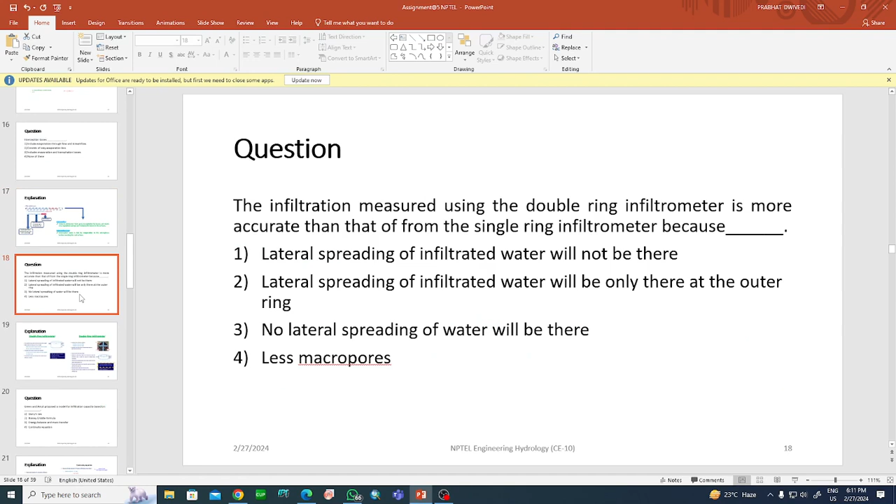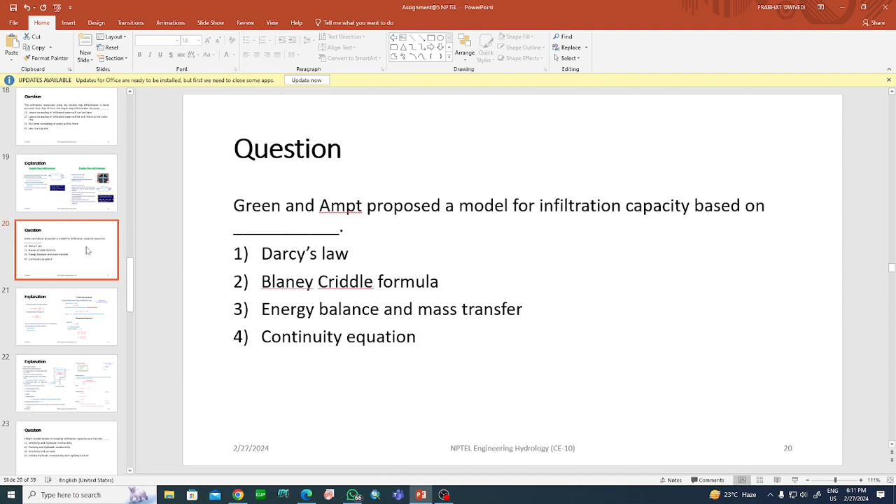One question please. We have one session from 6 to 8 and another from 7 to 9, two scholars are handling, is it right? Yes. Okay, last week I was a little late, at 6:20 or 6:25, I was asking permission to enter your session. Not last week, the week before that I think. I wasn't able to join, so I attended the next one, 7 to 9. Actually, sorry for the inconvenience. No, no, it's okay. I'm looking at the presentable screen, I'm not able to quantify that. No problem, no problem, it's always best we join in time. Thank you. So both are aimed with the same purpose, am I right? Yes, of course. Thank you.

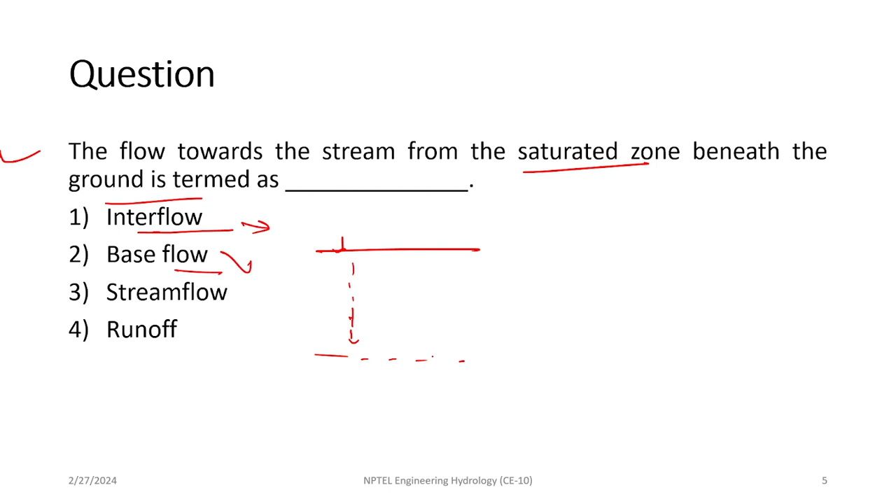Because whenever we are talking about interflow, that is a part of the groundwater flow only, and it is also generated because of the delayed movement of water. Whatever precipitation is falling in the region, it is moving, or getting infiltrated to a greater depth, and then getting accumulated and finally causing groundwater flow, meeting at a stream. So it will be called base flow, I guess.

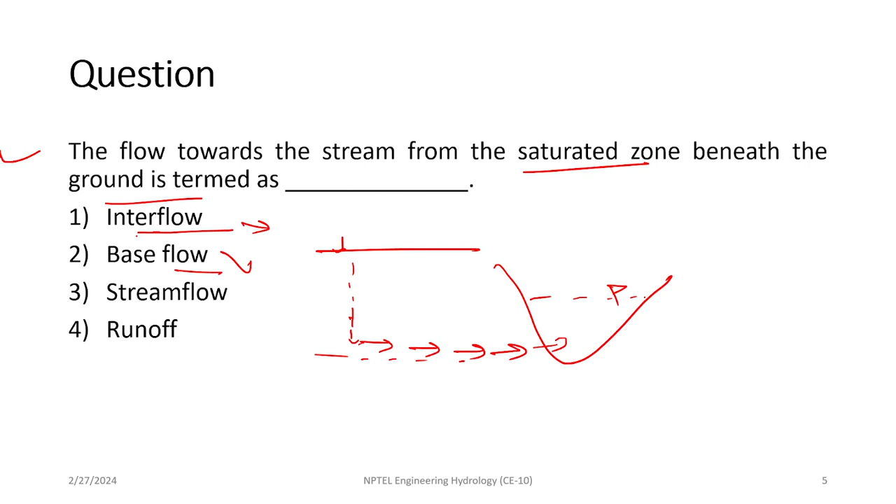So in the explanation you can see there is a water table. Base flow is caused because of the saturated region of subsurface, but if I consider the above part, that is unsaturated, here the interflow process is dominating. So within the unsaturated zone there will be a flow towards a stream, and at the same time in the saturated zone, water movement is dominating and causing groundwater flow towards a stream, so it's called base flow. But in the unsaturated zone, interflow process will be dominating here.

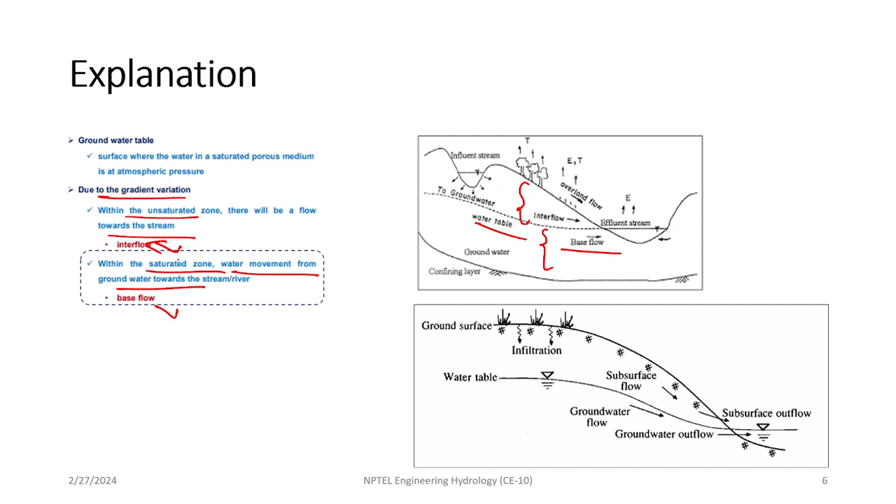Moving ahead, we can also see some explanation. Interflow is the lateral movement of water in an unsaturated zone, that is returning as surface water into a stream. But in the case of base flow, it is just a display of delayed flow.

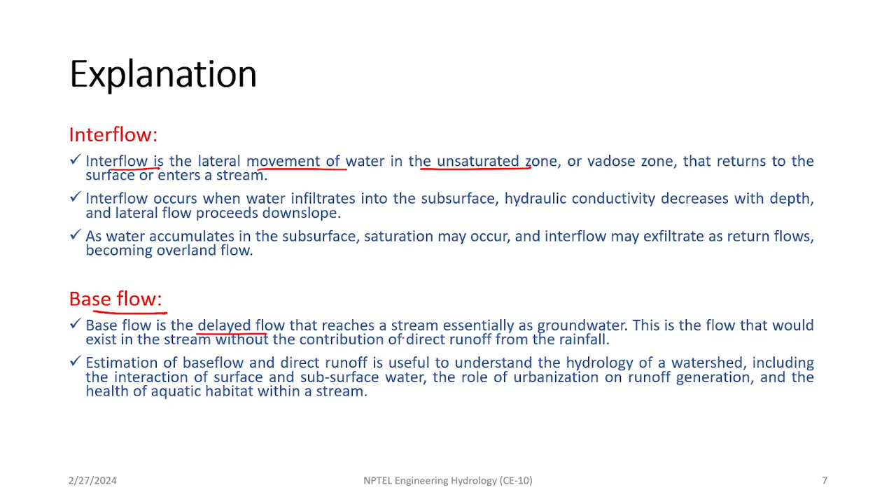Now coming to the question, which of the following equation is not used for infiltration capacity? So firstly, I want to know what you understand by the infiltration capacity.

There could be certain kind of land surface. Rainfall is falling in the region. There is subsurface strata. Now there will be a soil porous media, I will say that is soil, so connecting voids will be there. So if I am talking about the infiltration capacity, you can say that it is the rate at which the infiltration process is dominating in the subsurface soil.

So here it is asking what are the estimation methods available for quantifying the infiltration capacity. Anyone can answer? Yeah, it's Penman equation. Penman's equation, yes, right, NPTEL.

Okay, so Penman equation, can you further tell me where we are using this equation? Evapotranspiration. Yes, evaporation or evapotranspiration. Right, yes, of course. So Penman equation we are using for computing the ET in the region.

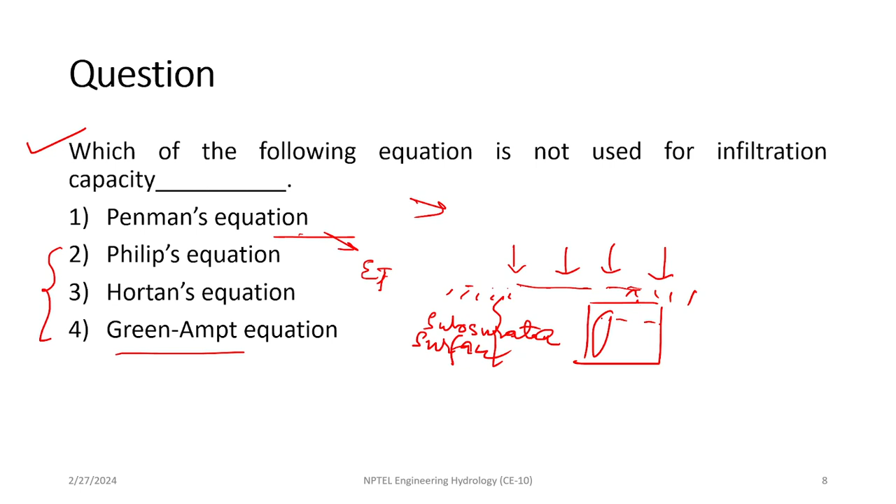So here Philip's equation, Horton's equation, as well as the Green-Ampt equation, these methods have different parameters, maybe different input data that we have to give, and then subsequently we are getting the infiltration capacity. For your information, I have just added a slide describing that Horton equation is part of the empirical equations, while Philip's equation and Green-Ampt are the theoretical equations.

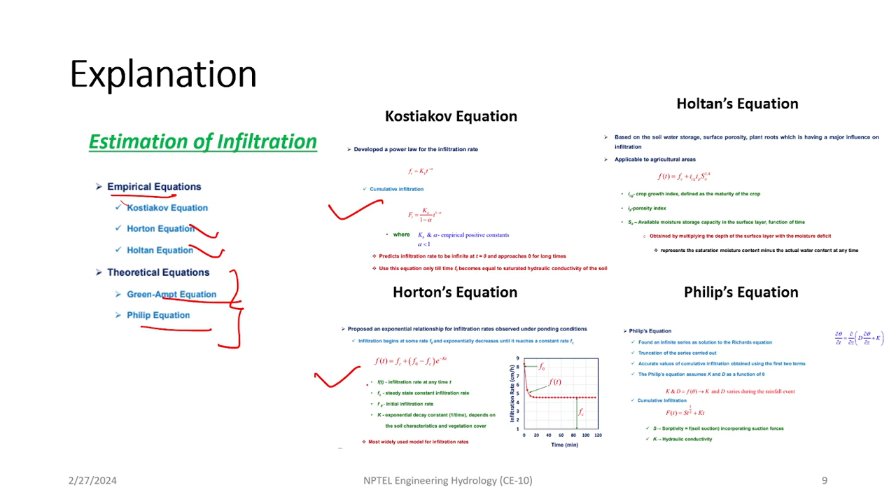And you can also see, you may be knowing whatever the general formula is mentioned for the different empirical equations. You might be knowing this from your lectures. Coming to the next question.

So, dash is responsible for flow of water in an unsaturated media. Yes, this is related to a kind of forces which are acting in the subsurface zone and then subsequently causing a flow. So what are they? List them out.

Suction head and datum head. Okay, suction head and datum head, right? Another one will be, can you guess another option? There may be multiple options as well. So yes, of course, if you are talking about the unsaturated zone, only the suction head and datum head will be dominating. But yes, if I talk about flow in the saturated zone, in the subsurface zone, then velocity gradient will also be accounted.

Not the velocity gradient, it will be a velocity head. Okay, well, yeah, yes. But in case of unsaturated zone, we know that groundwater flow is not dominating in this zone, right?

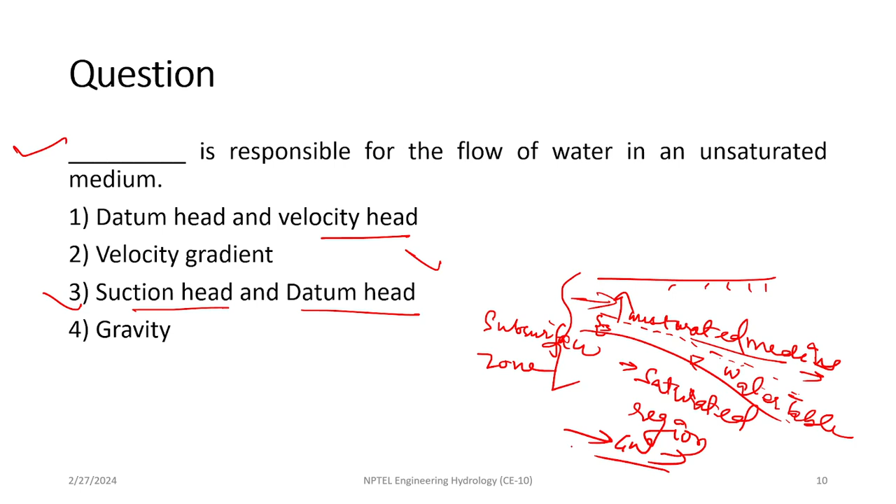Okay, but if we are talking about the water region beneath the water table, then you will call it a saturated region. So this is a saturated region. So definitely here the groundwater movement will be there, and because of this there may be a change in velocity gradient also, and that is causing a velocity head.

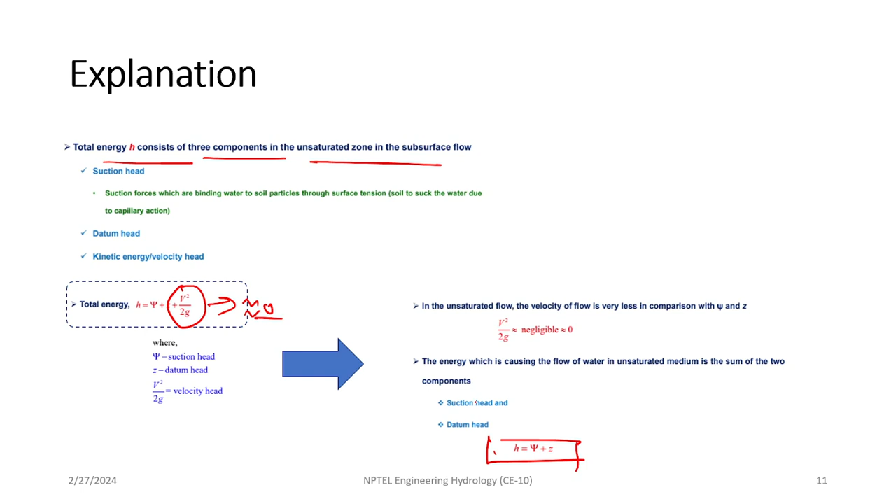You can see from the explanation, total energy H consists of three components in an unsaturated zone in subsurface flow. But you can note down here that this velocity head I am talking about will be nearly zero, okay, because groundwater flow is not here. So definitely the final parameters causing the flow here are suction head and datum head.

Moving to the next question: the moisture content in which zone is above field capacity but below the saturation. So it is asking about a moisture variation with the depth. Okay, so with the depth, how the moisture is varying. Are you getting, Ashish? Yes, yes, yes. It is asking about the moisture variation with the depth.

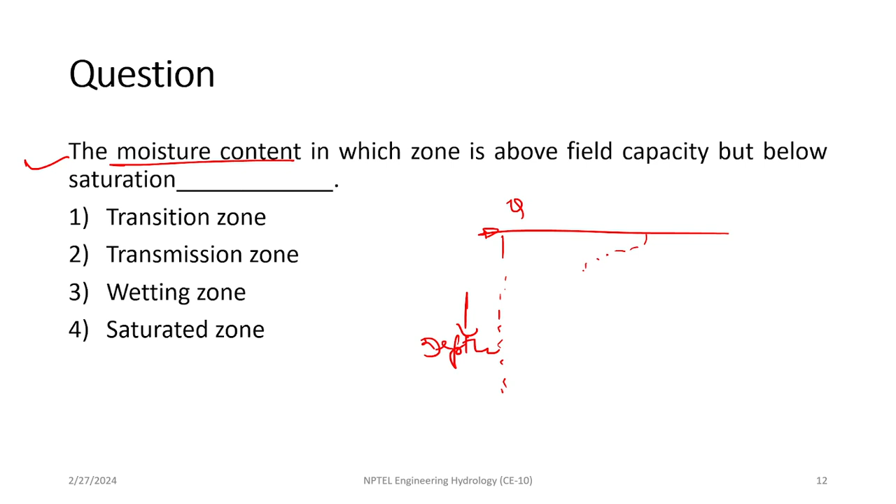So have you studied the variation of moisture content with respect to depth below the ground? You might be knowing the profile like this. Do you remember this profile?

Yes, yes, yes. So name them, what we are calling this region. There we are calling this region like as first. Transition zone, I think? This is not a transition zone. First one, it is not. Saturated zone, I think, right? Yes, right. So this is a saturated zone.

Why are we calling it a saturated zone? Because once rainfall is falling in the region, within, let's say t equal to 5 seconds, whatever infiltrated water is there, it is moving up to this much depth, let's say it is D1. But as the time passes on, this infiltrated water will be resisted by a front.

Front in the sense what? There will be a dry front, where the soil is not saturated, not having any kind of moisture, so it is not moving. Now there will be a change in the moisture content. So once it passes through the saturated zone, what would be the next zone you are knowing there? Transition zone. Yes, right. So transition zone will be there.

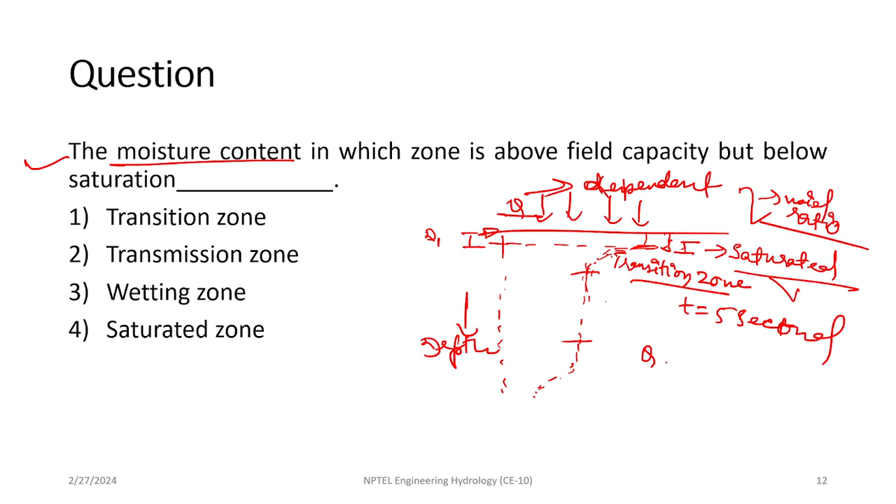So if I am saying that theta is 0 at a certain case, from the explanation you can see, I just added this for reference. Firstly, how is porosity defined? It is just volume of void divided by total volume of soil sample. And how do we define moisture content? It is just a ratio of volume of water to the total volume of sample available. So initially the soil is dry. If soil is dry, then definitely theta is 0.

Water has just started infiltrating. And the condition will be what? At the top surface, the moisture content is what? That is eta. It is equivalent to eta. As we are moving further down, we are seeing that the subsurface soil is getting moisture now, and it starts coming in the wet zone.

So here you will see a word, wetting front. Why is it called a wetting front? Because of this front, we can differentiate between the dry soil and the wet soil.

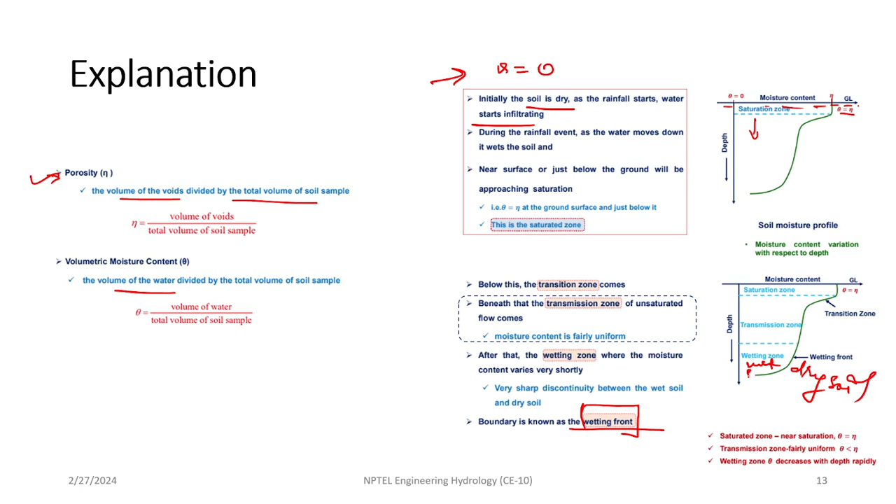Now I am moving ahead. If the rainfall intensity exceeds the infiltration rate, infiltration will be equal to... So firstly, let me know what do you understand by rainfall intensity. What is rainfall intensity? The rate at which precipitation occurs. Yes, right. So it's rainfall depth with respect to time.

Now it is talking about rainfall intensity in comparison to infiltration rate. So yes, firstly I want to mention that if I am having 1 meter cube of porous soil media, it can only hold a certain amount of water. Beyond that we can't say that, because if I assume that in total...

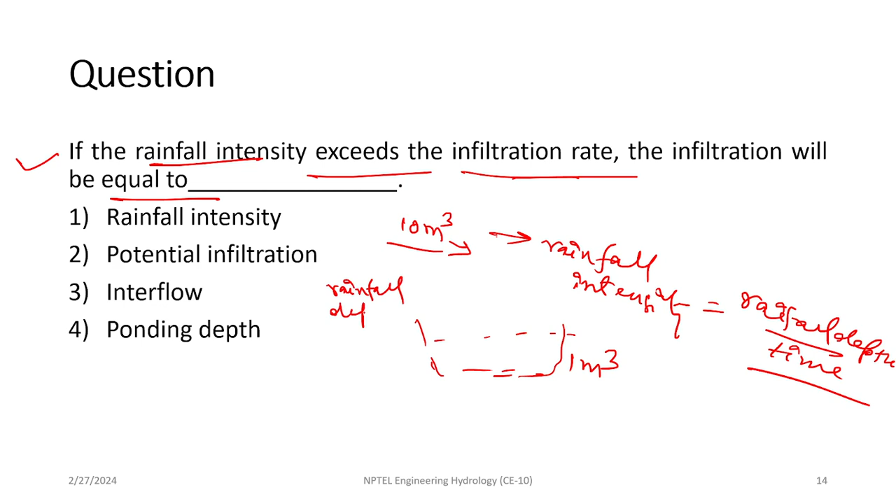10 meter cube of rainfall is falling in the region. Why am I talking in volume? Because rainfall depth we will be knowing. Let's say for example, 6 centimeter of rainfall is falling, and I'm also knowing the area of catchment. So I will multiply this depth with the area of catchment to get the rainfall volume, that is how much water has accumulated in this particular region.

Now I'm just talking about this subsurface zone. So I'm saying this subsurface zone has a volume of only about 1 meter cube. This can store only 1 meter cube of water. But what will happen if whatever rain has fallen in the region accounts to 10 meter cube of volume? Will it hold this much amount of water here? No, it can't. It will not hold. Yes, right, this is just for reference.

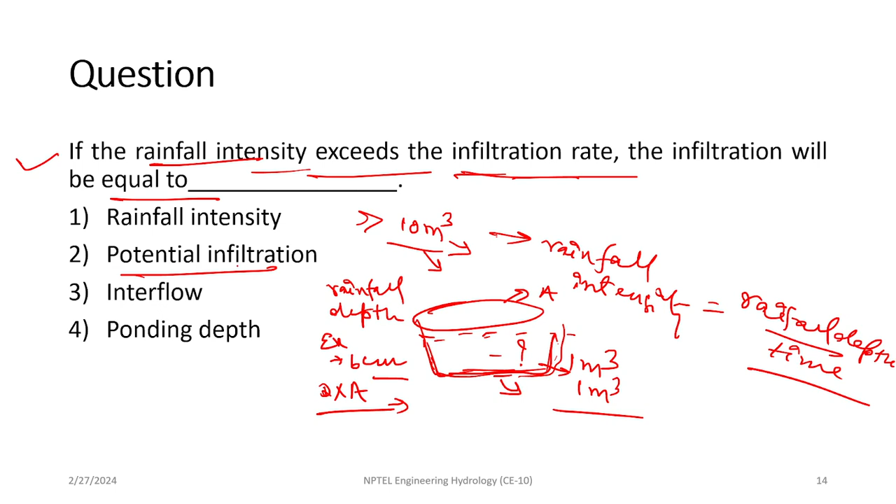It is asking this similar process that I'm just discussing now: that rainfall intensity exceeds the infiltration rate, then what could we call the infiltration? Definitely potential. Yes, potential infiltration, the maximum infiltration which can be stored in this particular volume. So it will be called potential infiltration. So for your information, I just added these things.

If I am calling rainfall intensity as I, and this I is exceeding the infiltration rate, so we are saying that actual infiltration is equivalent to potential infiltration, like how much maximum water it can withhold. From the definition, this is what is meant by potential infiltration - the maximum amount of infiltration that can occur at a given point of time.

Moving ahead, interception losses. What do you understand by interception losses? And then again, I'm just adding to this, why do these interception losses exist in our water cycle?

Before rain falls on any medium, whatever projection like roof or trees, canopy - the water which is caught by such structures is referred as interception. So whenever precipitation exists in the region and leaves are there, this interception loss basically depends on land use and land pattern. If forest cover in the region is very high, then there are more chances that out of 10 centimeters of rainfall or storm about to fall in the region, maybe only 2 centimeters reach the ground surface, because it is possible that 8 centimeters of rainfall can be intercepted by the leaves of these trees or small plants. So yes, it is causing an interception in the movement of rainfall.

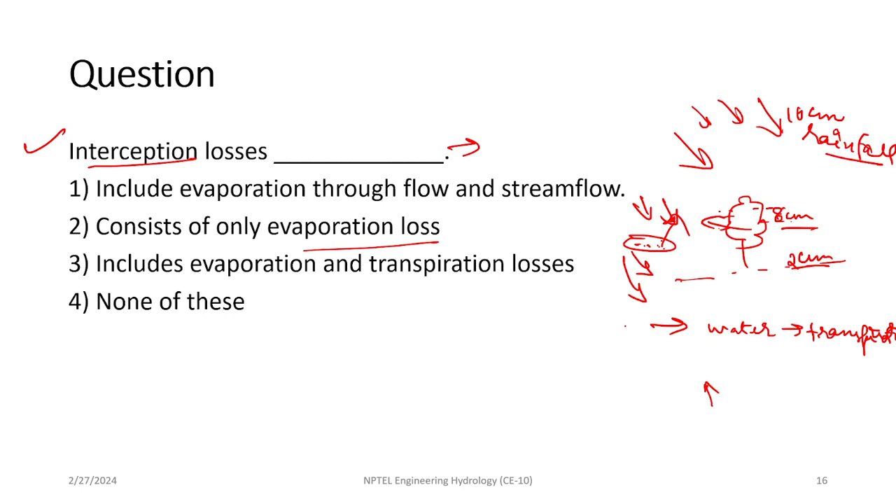Evaporation only will be the point that accounts for interception loss, because we are concerned with the water which is lying over the leaves. Whatever rainfall has fallen in the region gets obstructed by the leaves. These drops lie over the surface of the leaves, and once heat energy falls in the region, these drops have a possibility to get evaporated directly. But if I account the moisture moving within the leaves, then transpiration loss is also accounted.

For accounting the transpiration loss, we have one terminology - consumptive use of water. That is how much water we have to provide in order to compensate for the transpiration losses, because consumptive use has more importance when we are designing the canal, when we are transferring water from the reservoir to the final agricultural area. So based on the transpiration losses, we are computing the consumptive use of water. The answer is it is mainly an evaporation loss.

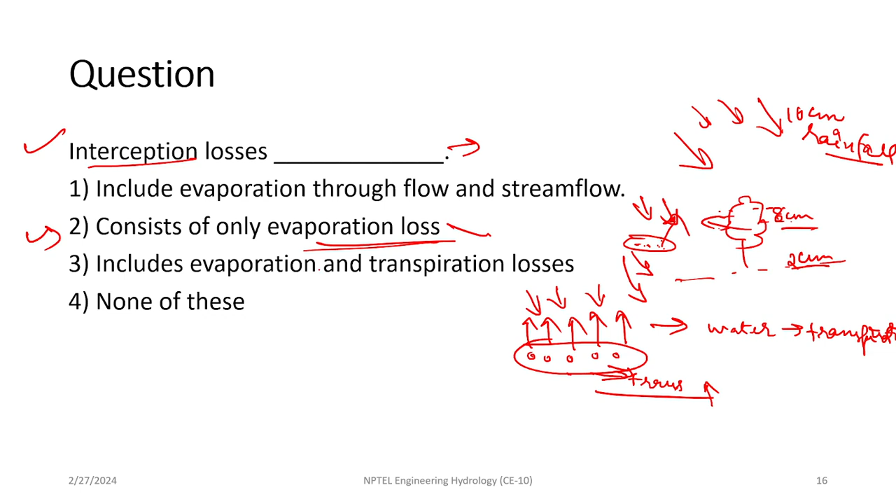Now whenever rain is falling in the region, some part of the rain could be stored in the vegetation, meaning those water drops are intercepted by the leaves and lie on the surface. Other part - not a loss, but part of the rain will be contributing to surface runoff, and the remaining part of the rain may be going as infiltration.

What are those regions where this infiltrated water could be stored? Yes, it could be stored within the soil void, these porous voids which are there, so it will be stored as soil moisture. Further down, that will be counted as unsaturated flow. And if it goes further deeper, it will meet the water table and contribute as saturated flow.

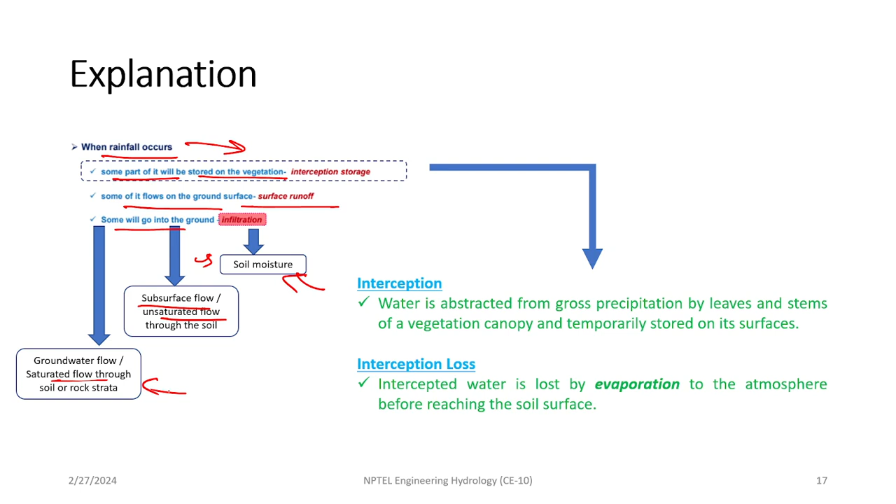Now coming to the next question: the infiltration measured using the double ring infiltrometer is more accurate than that of the single ring infiltrometer. It is asking about the reason.

B is correct, I think. Which one? B, the second one. Lateral spreading of infiltrated water will be only there at the outer ring. Why are you saying this? Can you tell me the reason?

Because for the double ring infiltrometer, we use two rings, one inside and one outside. So what is the purpose of using the outer ring, and what is the purpose of using the inner ring? The purpose is that we want to make it a 1D, one dimensional steady flow. Yes, that's why we want to reduce the lateral flow of water.

Right, you are right. So whenever we have a double ring infiltrometer, I am just talking about its cross section. This picture was about the cross sectional view. I am just talking about the vertical variation.

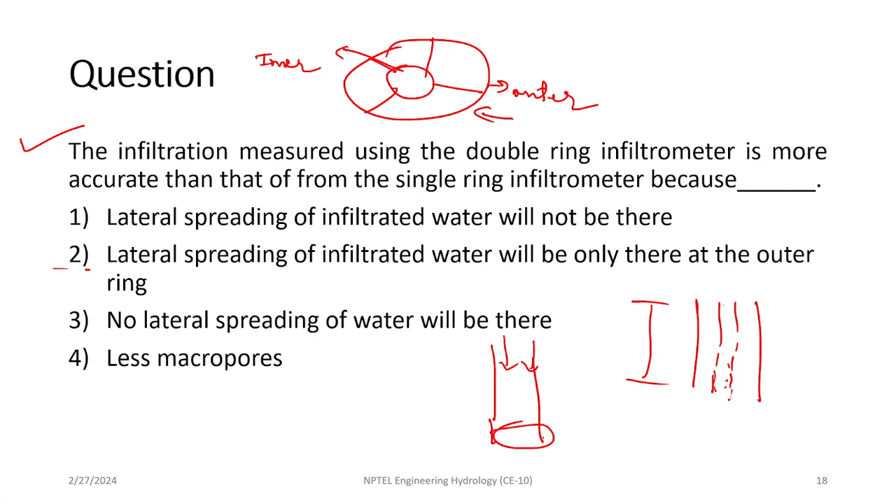So if I am just considering a single ring infiltrometer, whatever water we are giving into this, there is a possibility that this water could go laterally, right? And we are not able to quantify or clearly determine how much water has infiltrated in this particular area, because water has already been lost in the form of lateral movement.

So what researchers came up with: they first took a single ring and then added another concentric ring, just to avoid the lateral movement of water and cause it to behave as 1D movement. Now the water is only moving as 1D, because here a front will be generated.

A dry and wet front will be generated here. You will see that whatever soil particles are here, they will get saturated and form a wet front, and the remaining region will stay as is, with little possibility that water moves in the horizontal direction. Yes, right, exactly.

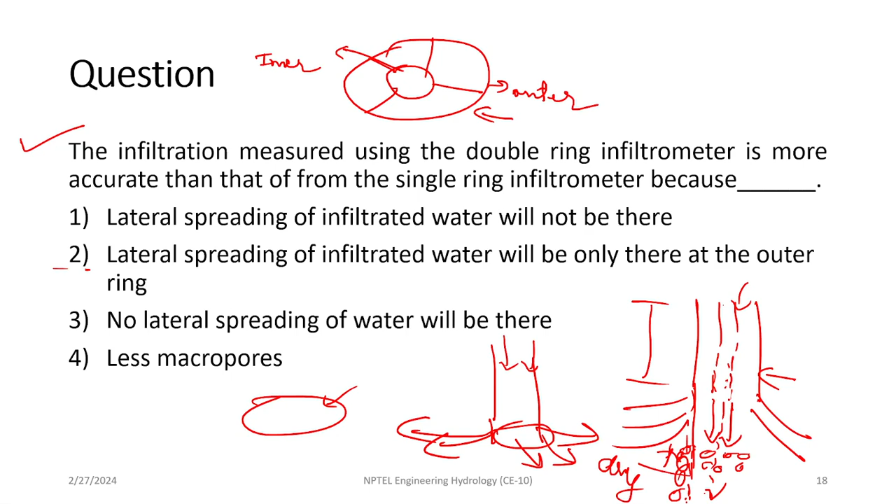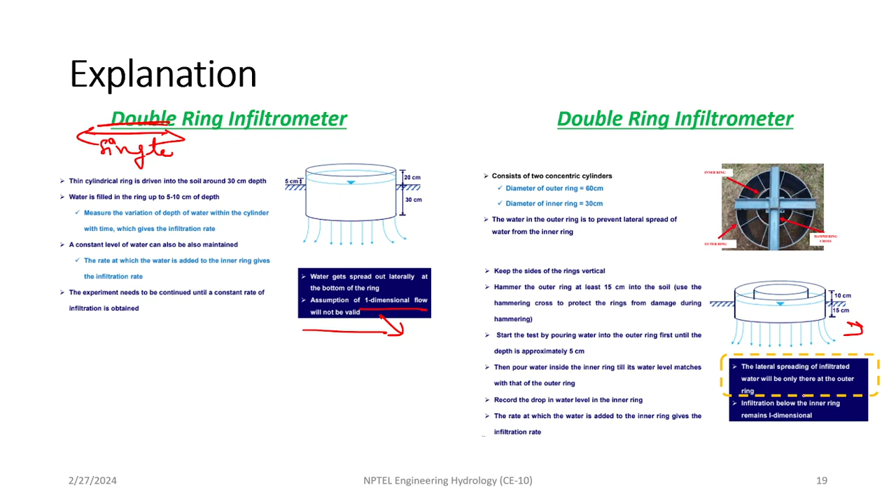So I'm moving ahead. This picture is for your reference. Of course, our target is to determine 1D flow, but in the case of a single ring infiltrometer, sorry for the confusion, you can correct it. Here we are not able to quantify 1D flow, but when using the double ring infiltrometer, we are able to quantify it, because we are able to prevent lateral movement of water.

Coming to the next question: Green and Ampt theory proposed infiltration capacity based on what principle. Continuity equation. Okay, yeah, that's the answer.

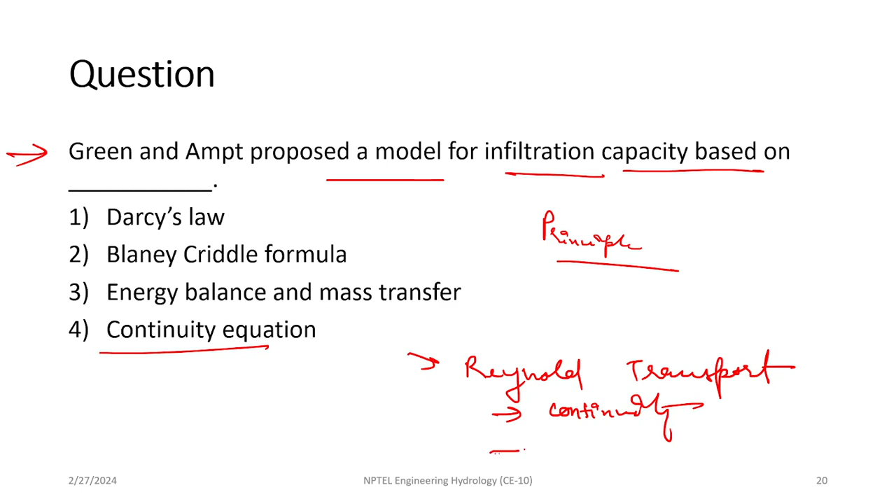Of course, if we say continuity equation, this cannot be accounted for alone, because this entire infiltration capacity model is basically derived from the Reynolds transport theorem, right? This Reynolds transport theorem accounts for both the continuity equation and the momentum equation. So momentum conservation will also be there, and the continuity equation will also be valid here. After solving the momentum equation, we arrive at Darcy's law.

This Darcy's law is applicable when we assume that whatever groundwater flow is there, it has laminar flow. So this entire Darcy's law is basically applicable for laminar kind of flow, and here groundwater can be considered laminar because it has very slow, very low velocity.

So here you can see that this Green-Ampt equation is based on the continuity equation as well as the momentum equation. When we go through the continuity equation, we deal with parameters like moisture content, and if we talk about the momentum equation, we deal with Darcy's law.

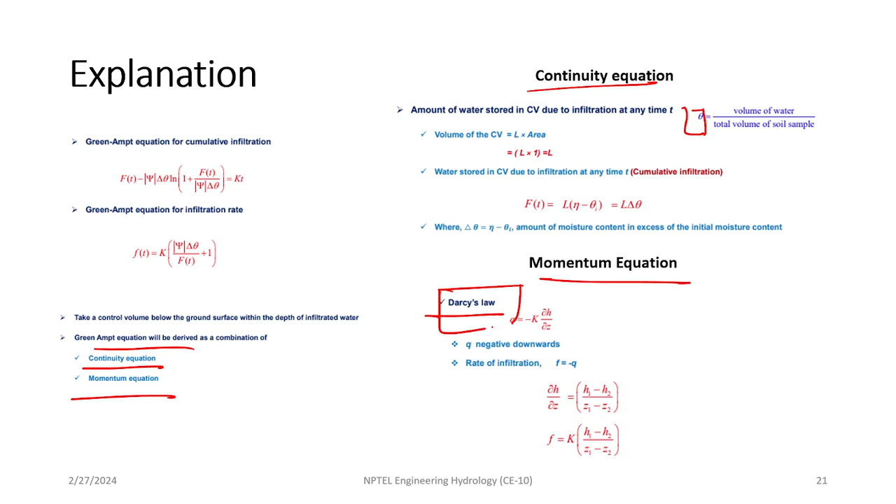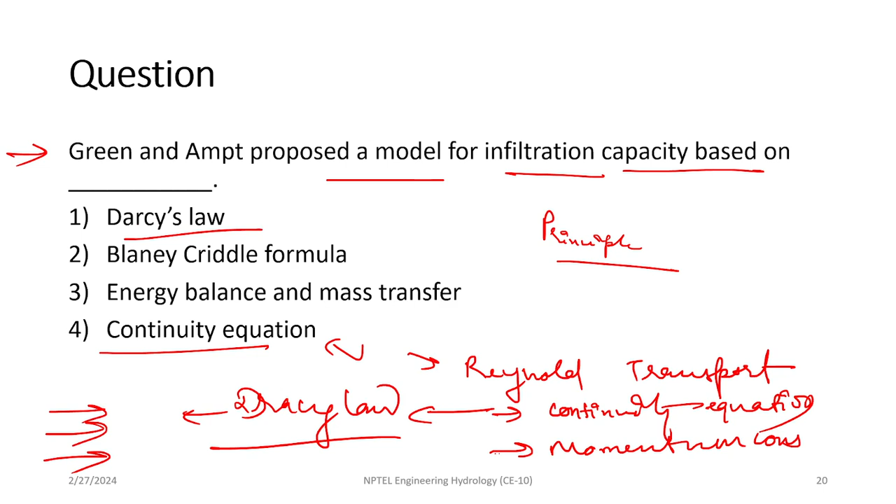So whatever the question mentioned, Green and Ampt proposed a model for infiltration capacity based on, the momentum equation is not mentioned, so we cannot alone say that the fourth option is correct, but yes, of course, Darcy's law is the major driving force here.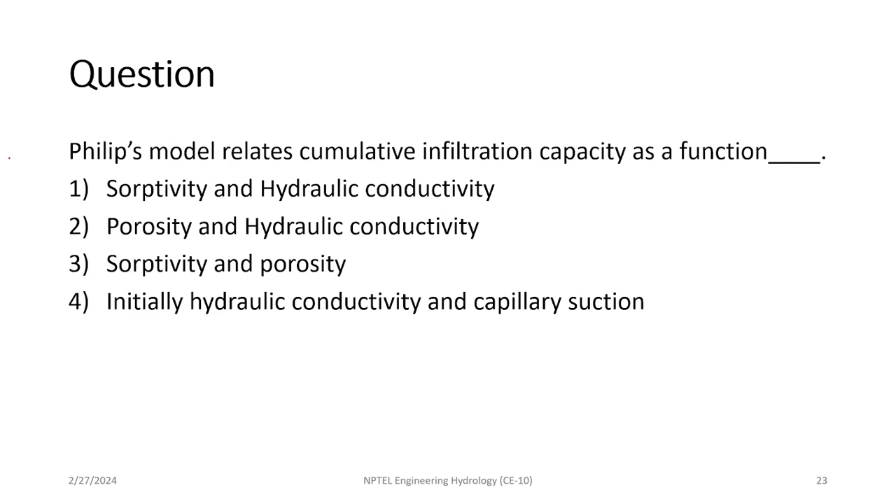Anyone is trying to join? Okay, Ashish, shall I move ahead? Yes, okay, so now question - can you go to the back slide? Right, right. Yeah, from the data we can see that initially the infiltration rate can vary from high or low, but at the end infiltration rate becomes constant.

Yes, right. So basically, whenever we are talking about infiltration rate, there are properties related to the soil texture. If infiltration rate is high at 5 minutes compared to 10 minutes, there could be a possibility that soil texture varies. You can assume in the first layer it may be sand, right? And if we go deeper, there may be a mixture of sand and clay as well, right?

So what is happening here - if clay is here, then it will try to hold the water, and infiltration gets lower now. It is not passing at the rate that was initially found in case of sand. Got it?

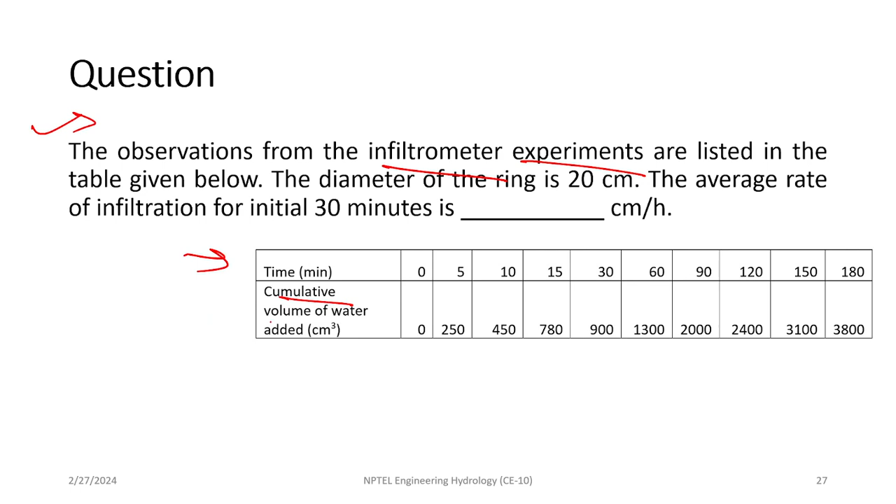Similar to the previous question, we again have infiltrometer experiment data, time versus cumulative volume of water added. Now in the previous case, the question was related to constant infiltration rate, at what time we are getting constant infiltration rate value.

Now it is asking about average rate of infiltration for initial 30 minutes. So for initial 30 minutes, that is 0 to 30 minutes, right? Now it is asking about the cumulative value, cumulative rate of infiltration.

Got it? Because it is asking for the initial 30 minutes, that is 0 to 30 minutes. So we have to compute cumulative rate of infiltration here, we don't need to find out incremental values now. In the earlier case, we were asked to find out the constant rate of infiltration, so what we did, we tried to divide the accumulated or cumulative values in different time frames and computed the data. But now we have to compute directly.

So for this, we already have time and cumulative volume of water added. I will be writing like this: 0, 5, 10 - they are already in minutes. So if we are about to compute in hour, centimeter per hour, what do we have to do? 5 by 60 and 10 by 60, right? So it will be giving us units in hours.

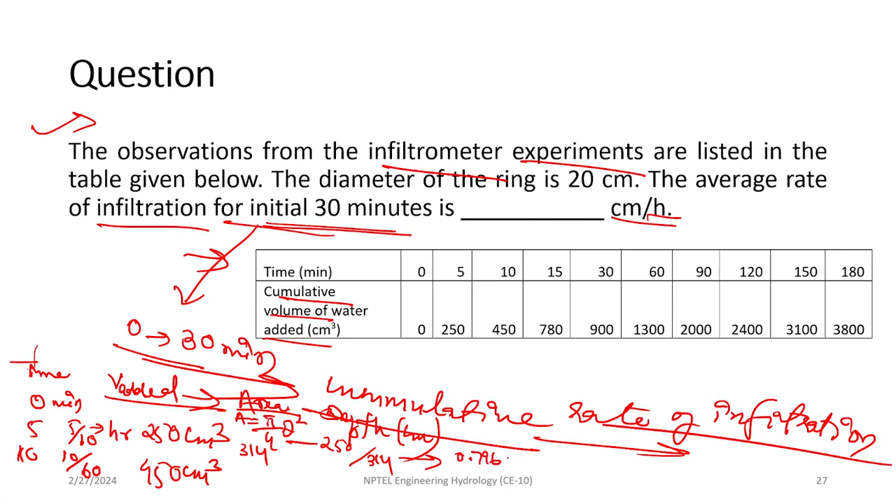Now you got the infiltration depth. Now you also know that this infiltration depth was achieved at 5 minutes, right? So 5 minutes you have already computed, 5 by 60. Now you have to divide 0.796 by this converted value in hours. So divide it and tell me the final value. The value is 0.0026.

0.0026 centimeter per hour. Okay, let me see - how come? Wait, how come 0.0026? 5 divided by 60 is 0.083. Just a minute - 0.796 divided by 0.083... no, it's 9.59, sorry.

Balamurugan, you might have gone through some of the empirical equations - for example, Horton's equation. You might have come up with the parameter k, e to the power kt. Ashish, do you remember this Horton's equation? So my answer is wrong, that is 9.552, sorry. Manikanta, how much are you getting? Okay, 5.1.

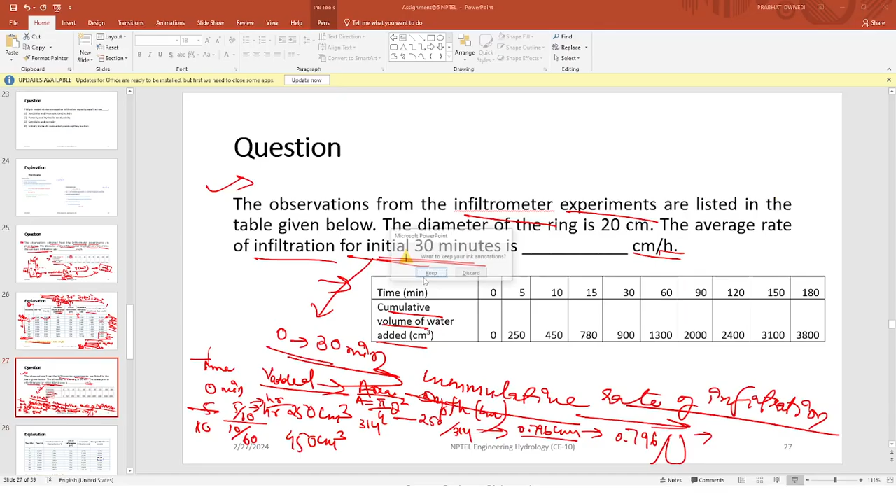I guess Manikanta was answering something, 5 point approx. I guess he is getting the final answer, right? Manikanta, are you getting the final answer? This is your final answer because... okay Ashish, let me know if he is replying. Okay, for time being I'm moving.

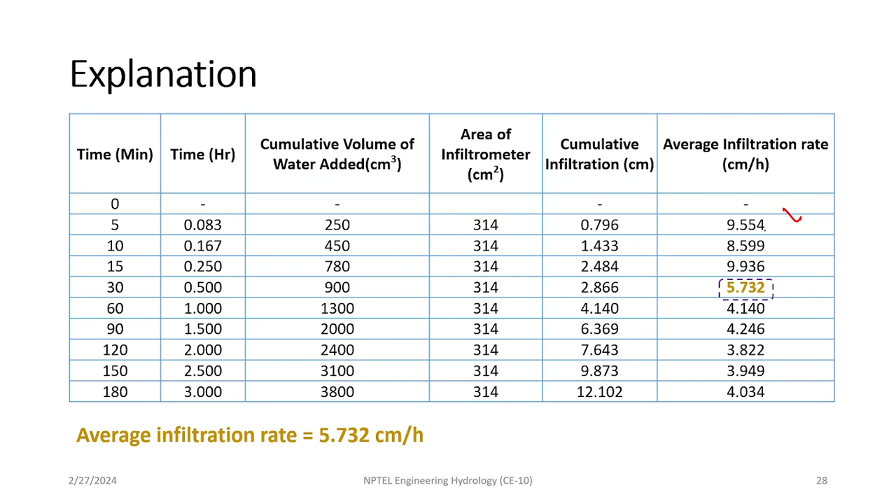Okay Ashish, you got this value right, 9.554? Yes. Okay ma'am, are you getting the answer? Ma'am, you have also raised a question, can you tell me? I'm just working, I didn't finish, that's why I didn't give the answer. Okay, I worked but I just got stuck up in between, so it was delayed. I'm working now. Good, no issue.

Ashish, yes, try to get the value. You can compute for 15 minutes as well. Are you getting this, because whatever the calculations are here, they are from my side. There may be a possibility that you are getting some other values. Okay, just a minute, I'll check it.

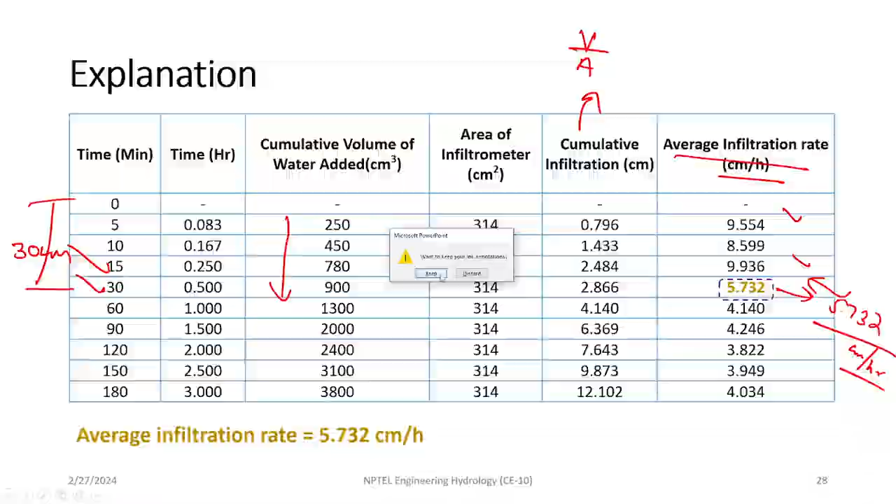From the name itself you can have an idea that it is asking about average infiltration rate. Okay yes, okay 5.732, good.

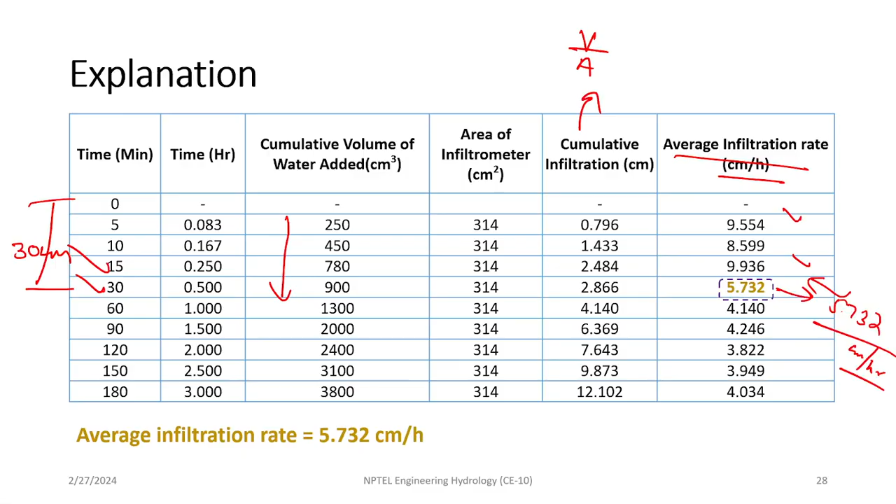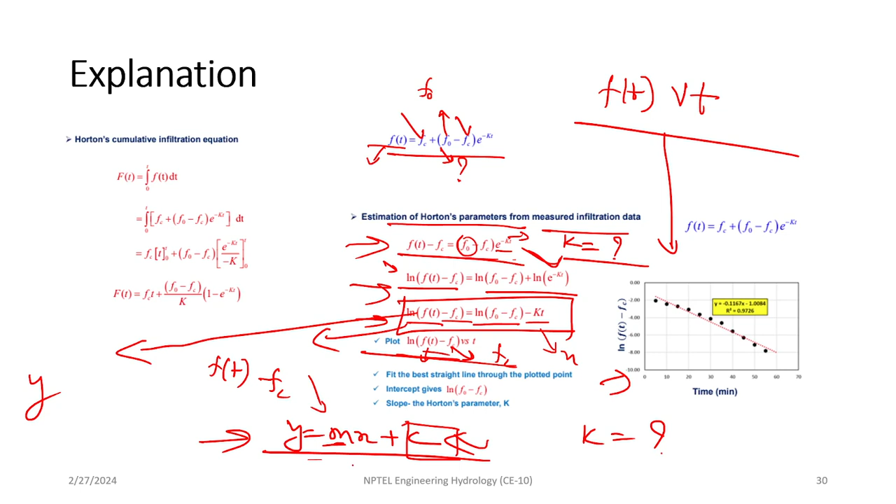Plot the points and get the y-intercept. Yes, right, but I am just asking about K. So K will be just the slope. Okay, slope M. Yes, oh, slope. Sorry, slope, right, slope, sorry. So it will be the slope only.

So once we plot this graph, after getting this plot, we understand that yes, there is an intercept, C, and at the same time there will be a slope of this straight fitting line. We will be fitting this entire data with a certain kind of straight line, or we can say whatever possible curve we can use. But for time being, whatever data you get, it is totally linear. So you will be getting direct data from here. So the slope can be computed, and we can get the K value directly.

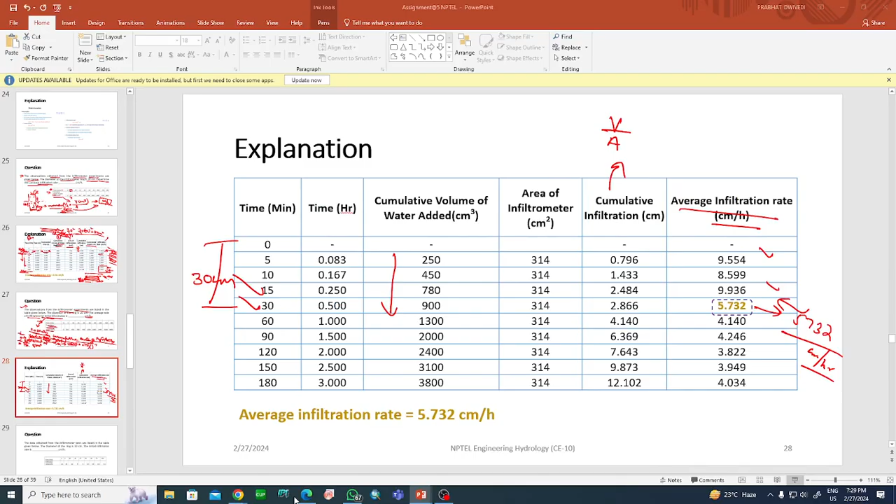Ma'am, are you having any question right now? No, I'm also working, I got it. I'm working. Okay, that's good. I understood your explanation. Yeah.

Now what is our next task? What is our next task after this table? Okay, the task is we have to calculate the initial infiltration rate. Firstly, tell me what we are trying to achieve right now. What we are targeting. What was the missing thing? What we were not having at that time. Okay. Firstly, tell me. F naught, F naught.

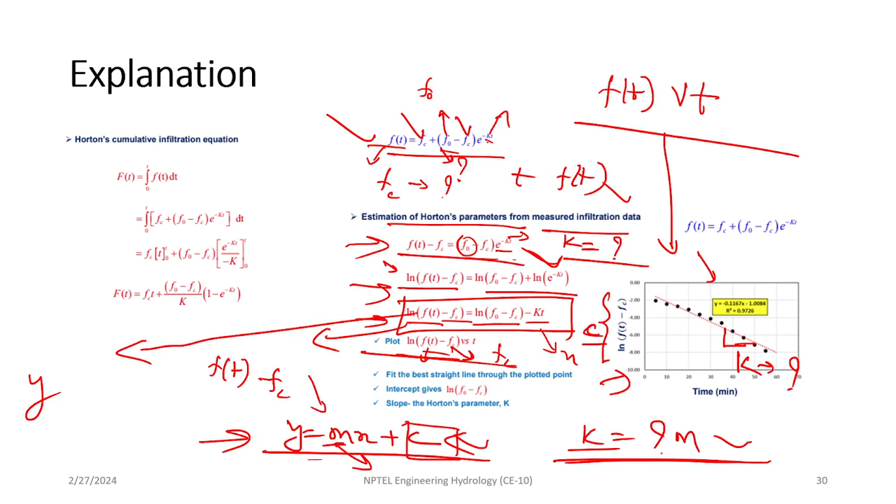Because do you think from a single equation two unknown parameters can be computed? No, we already have this equation only, right? Yes, for solving two unknowns, we at least need two equations. But at present, we only have one equation, and we can't compute K, F naught in parallel. So what we come up with is plotting a graph.

So now, whatever the things we are doing, it is for plotting the graph. Plot between what? Plot between FT minus FC, ln of FT minus FC, with time. Now we are about to plot the graph between them.

Ma'am, are you getting it? Okay Ashish, now this is the graph. Maybe whenever you are solving this problem, like if it is a written examination, then definitely you will be provided with the graph also.

And what you have to do is that you are plotting the ln of FT minus FC, which is varying with the time. Got it? And see that these points are mainly fitted best in a straight line. If I will be getting points in this manner, in this fashion, then definitely there could be a possibility of a curve. But this time these points are best fitted with the straight line.

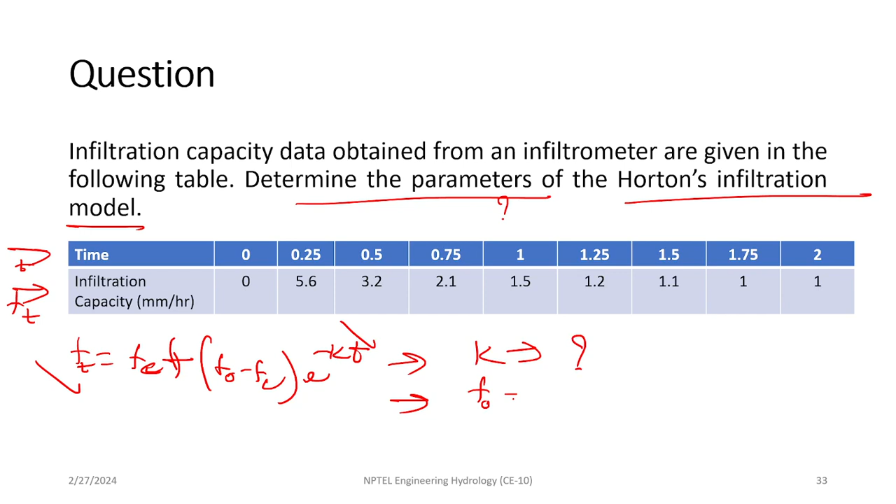For this question, they have provided what? You already have the time value, you already have the FT variation. So you got the FT, now you got the T value. Now what are the unknowns? So your unknowns are the K value. Now another one is F naught, this is an unknown parameter. Now at the same time FC is also an unknown parameter.

But from this given data in the table, you can directly compute the FC. Ma'am, are you agree with this? Yeah, I understood, it's 1. Right, got it. Okay, so you got the FC value now. Now, what is the process to compute K and F naught?

What is the process or approach we can follow to compute K and F naught? Similar process we have to follow, taking the slope, natural logarithm. So similar process, in the earlier case what we followed, we have to follow the same.

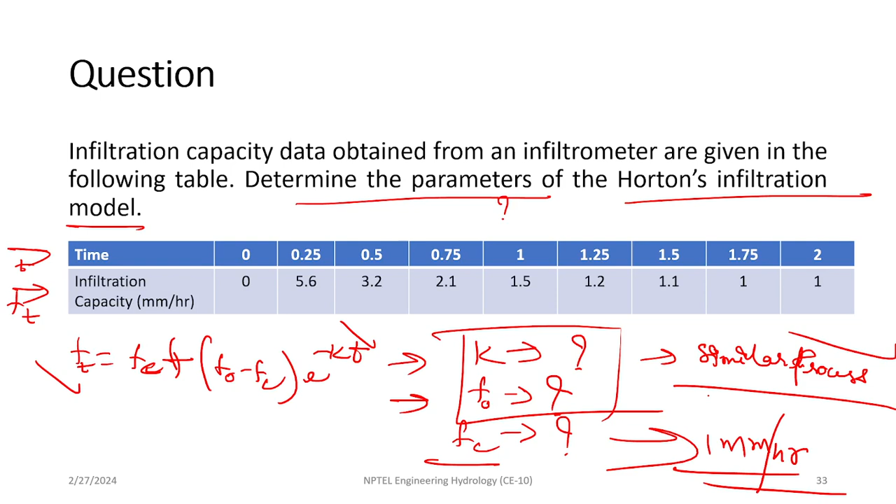The thing is, this entire problem is more easier if we get direct parameters, like K value, F naught and FC, because our calculation may get wrong if we don't pay attention while plotting the graph, that is ln(FT minus FC) versus time. So in that case only there could be a possibility of error.

Now this is just for your information, here in this case, whatever the points were there, we were getting the equation y equals minus 3.1x plus 2.344. Now tell me the k value from this equation. What is k value?

So k value. Don't get confused. Y equals mx plus c, and I am continuously saying that m is representing the k parameter. 3.1 is the k value. Minus 3.1, you are right. So it is a k value, right? Maybe magnitude won't be considered because k is only positive. In terms of magnitude, we will be considering 3.1. But whenever we are expressing in the Horton's model, we have to take minus 3.1.

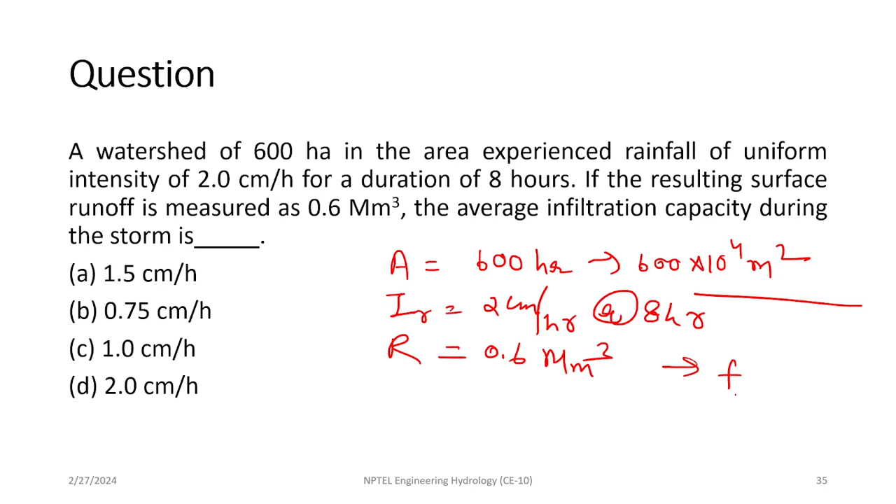Now what they have additionally given is rainfall intensity, so I am writing it as I. It is 2 centimeter per hour, and it is continuously falling for 8 hours. Now one more thing they have provided, surface runoff, which I am writing as R. It is given as 0.6 million meter cube, and they are asking for computing the average infiltration capacity, which I can write as F average, and we want to compute this.

Now how can you do this? Any approach? We need to subtract the runoff from the water stored. Exactly, so whatever the rainfall is falling here, we will subtract the rainfall depth with runoff depth. Keep in mind I am talking about runoff depth and at the same time this rainfall depth. So firstly we have to compute rainfall depth, and then we will subtract it by runoff depth.

Now tell me, what will be this rainfall depth? If we have the intensity known, and we also know how much time this rainfall occurred in the region, what will be the total rainfall? We need to multiply intensity with the time. Yes, so it will be 16 centimeter, right? That's correct. Is it clear? Yes, clear. Good. So we directly got the value 16 centimeter.

Now what about the runoff depth? How can we compute it? In terms of unit, you can see it is in form of volume, right? We divide it by area, V divided by area, that's simple. And what is the volume? You have to open it because it is in million meter cube, so 0.6 into 10 to the power 6, yes, it will be in meter cube, and now you are dividing by 600 into 10 to the power 4 meter square, right?

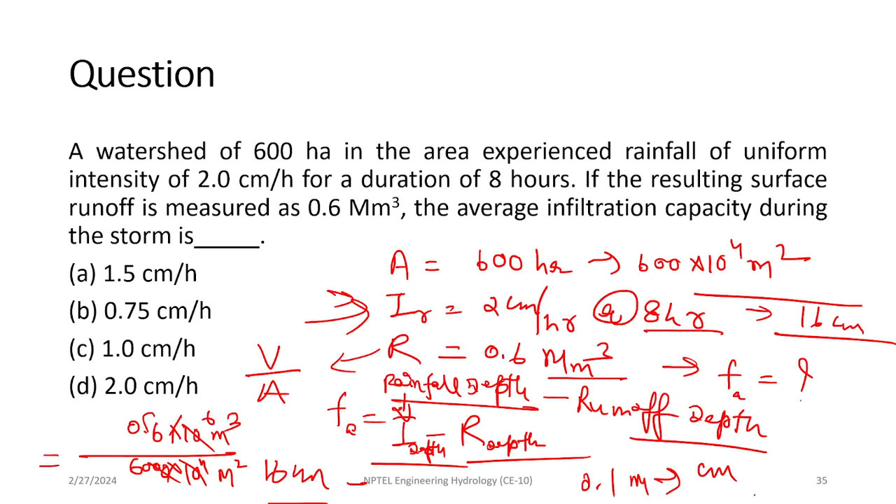Now tell me what value you are getting. 0.6 into 100 by 600, 0.1. Okay, 0.1, so it will be in meters, but we have to convert it into centimeter. So how much is it? 10 centimeter, that's good, 10 centimeter.

So what will be the infiltration? 16 centimeter of rainfall occurred in the region, and simultaneously 10 centimeter have flown away in the form of runoff. Now how much amount of water has been infiltrated? So it is 6 centimeter.

Now average infiltration capacity is asking, so it is in the form of rate. Within 8 hours, 6 centimeter of rainfall infiltrated beneath the ground. So tell me what will the infiltration rate be? 0.75 centimeter per hour. That's good, yes, this is a quick one, good, nice try.

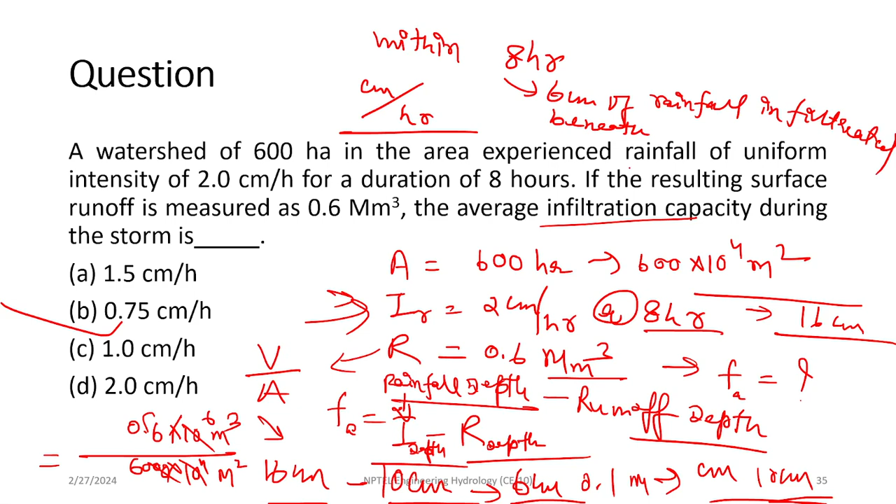So see the answer, you got that. Was it easier or not? Yeah, it's easy. No issue, now let's come to the next question.

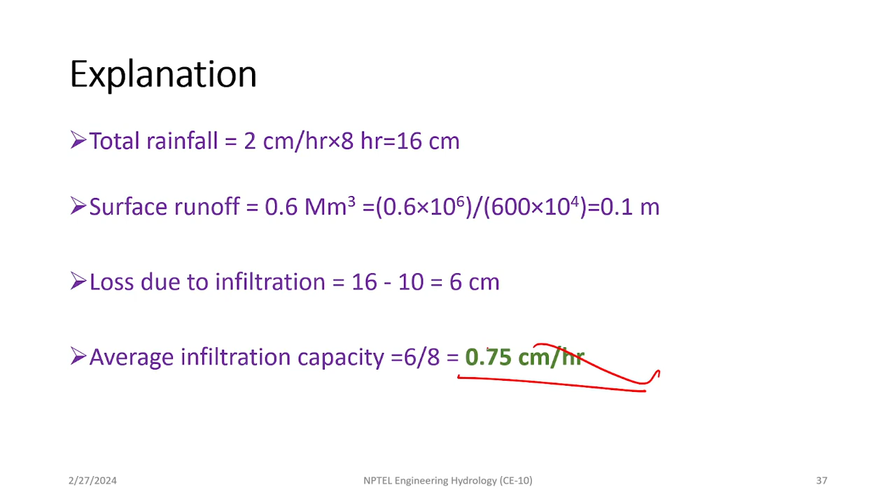So again the question is related to Horton's infiltration equation only. Firstly tell me the equation again, it should be learned by you now. Tell me. Ft is equal to Fc plus (F naught minus Fc) e to the power minus kt. That's good, brilliant. Now see what parameters they have given in the question itself.

So what are the parameters? They have given initial infiltration capacity, what is this, F naught. Yes, F naught is given and it is 10 mm per hour, right?

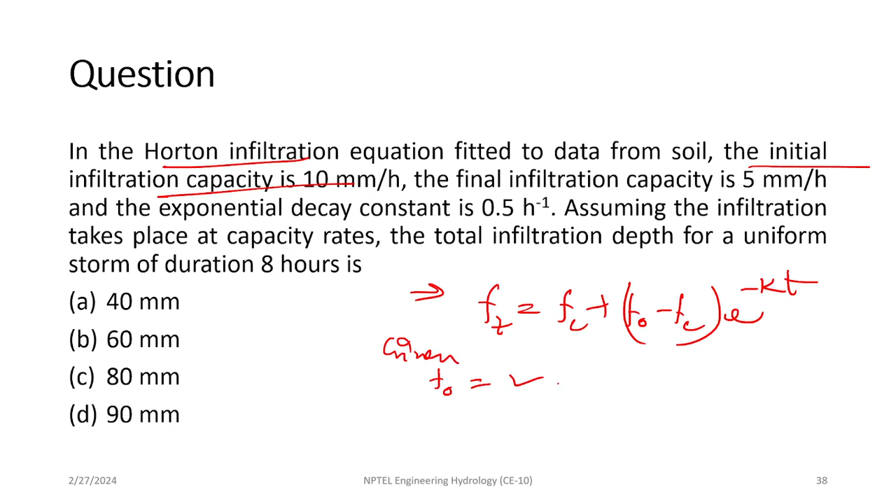And then if I talk about final infiltration capacity, that is FC. How much is it? It is 5 millimeter per hour.

Then again, exponential decay constant is given. That is the K value. And you can see the unit also, it is 0.5 per hour.

Now, whatever unknown parameters we were looking for while modeling the Horton infiltration curve using this empirical approach, we already have the unknown values. F naught, FC, K are known. Now what is it asking? It is asking to compute the total infiltration depth for a uniform storm of duration 8 hours.

Ashish, tell me what is FT? Is it total infiltration? No, FT is infiltration per unit time. Yes, good, it is infiltration per unit time.

So what we have to do in order to compute total infiltration, FT, you might have gone through lectures that if we want to compute total infiltration, we have to integrate the infiltration rate. So f of t we have to integrate from t equal to t1 to t equal to t2, so we can achieve the direct value of total infiltration.

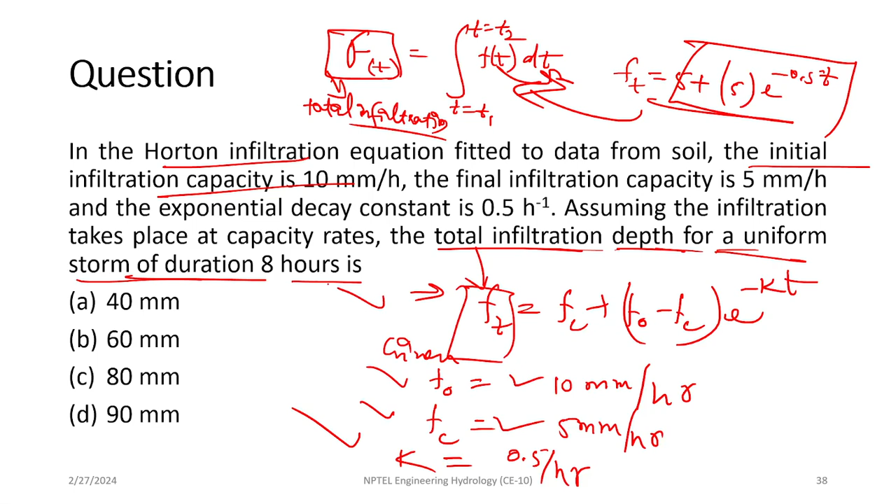Ashish, tell me, I am writing here. Ft, t equals, what will be the T1 value? Can you tell me? Total infiltration depth is asked for a uniform storm of duration 8 hours. So T1 is equal to 0, and then it will reach up to 8 hours.

Now tell me the Ft value. 5 plus 5 e to the power minus how much? It was 0.5 I guess. Yes, 0.5 into T.

Now tell me the integration, I'm just separating this bracket, opening it again. Let's see, t equals 0 to t equals 8. Then this will be 5 into dt plus, t equals 0 to t equals 8, we are having 5 e to the power minus 0.5 into t. 5 is constant, we can take it out, and we have to integrate this alone with respect to dt.

So what will be the value of this? It will be 5t, right? Do you agree with me? Yes, that's good ma'am. Now tell me the value of this. So 5 will be out here. What is the integration of e to the power x?

If there is some kind of e to the power x, or e to the power ax, what is the integration of e to the power ax with respect to dx? Do you know? Sir, e to the power x by a. Yes, it is e to the power ax upon a, right? Am I right? Yes sir.

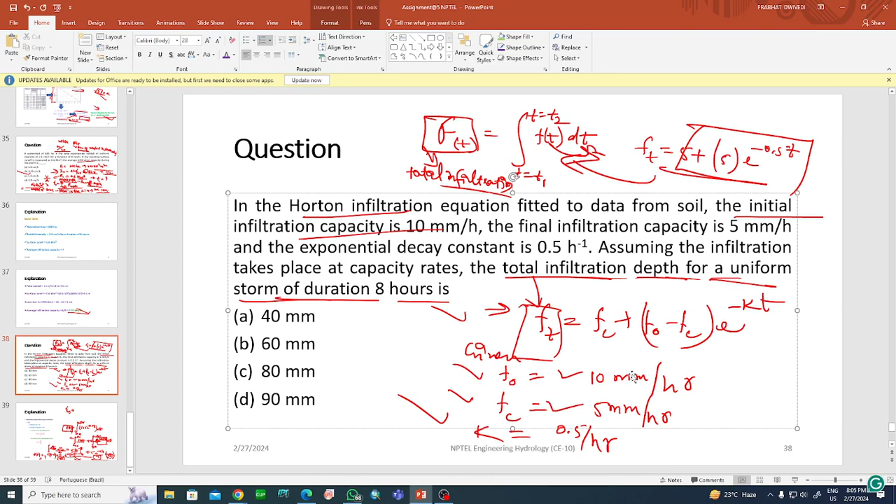What? Sir, the answer goes around 50 mm. You are saying the answer, right? Yes sir, yes sir, but in the options there is no option for 50. Option is not there, right? Okay, let me check. What is your answer? 50 mm, sir, 50 mm. Okay, don't worry Manikanta, I will check it out, and in the next session we can discuss it.

Okay, I will confirm you, sir. Okay, don't worry. Just a small representation, the same, I had a problem in assignment, previous assignment.

I had given hexadecanol or cetyl alcohol. It just took it as wrong. I think because it is system generated, it just takes one string. Is it right? For an element which controls evaporation, the answer I had given the chemical name hexadecanol or cetyl alcohol, and it made it wrong. And we had discussed a problem based on pan coefficient, which ranges from 0.7 to 0.8. So when it's not given, we can assume. Substituting 0.7, we had a lower value. That was also taken as a mistake, and it takes the upper value. So both were wrong for me in the assignment. This is just a representation.

We feel a bit disappointed. Means you are submitting the assignments, but you assume some values, and they are not considering it. That problem you discussed in class, the pan coefficient can be taken ranging from 0.7 to 0.8. So I used 0.7 and got 28,000 or something. That answer was taken as wrong, and only the upper limit was taken as correct. Similarly, cetyl alcohol has the chemical name hexadecanol. I had given both, it said wrong. So I think certain things I do not know how to represent, or because it is system generated, so it fails.